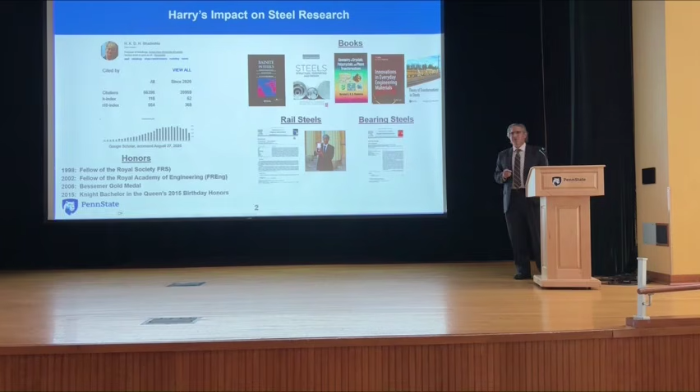So just to give you a little concept of what Harry has done in the steel business, if you are really interested, I would say go onto YouTube. I wanted to play a little bit of this in his own words, but this is just a really great description of a lot of the things Harry has done. And I know people like to listen to podcasts, and if you get a chance, BBC Radio 4's The Life Scientific was a terrific description, and really gives you an idea of how you can take and study and really become an expert in something.

You know, we might consider steels to be mundane, but you really look at what steels have done, where they are, how complex they are, how much of our basic foundational knowledge within material science and metallurgy goes back to steels. It's really fascinating, and I highly recommend every student should really listen to this. It is definitely inspiring and maybe give you a little bit of motivation to continue doing what you're doing. So if I'm embarrassing you, Harry, too bad.

But the other thing is, he's the Tadej Pogacar, and if you are not a cycling fan, shame on you. He's the Tadej Pogacar of metallurgists when it comes down to it. You'd rather have some of the other British riders, but Pogacar has won 4 Tour de France's since 2020. Harry is an avid cyclist. If you look here, that's a 63-kilometer ride he just did. He's an avid cyclist, and one I'm always fascinated by. Not something I like to do around here, because drivers in Britain actually respect cyclists, unlike here in the US.

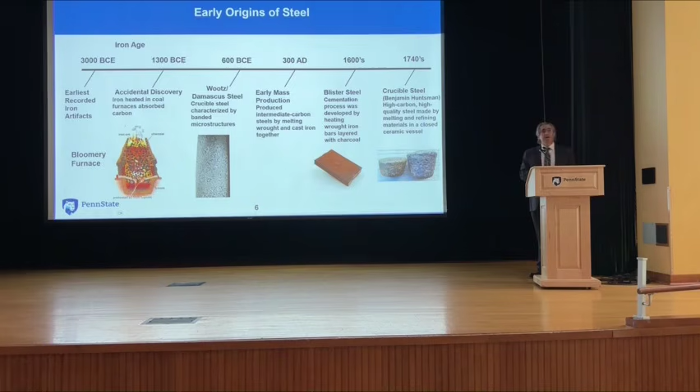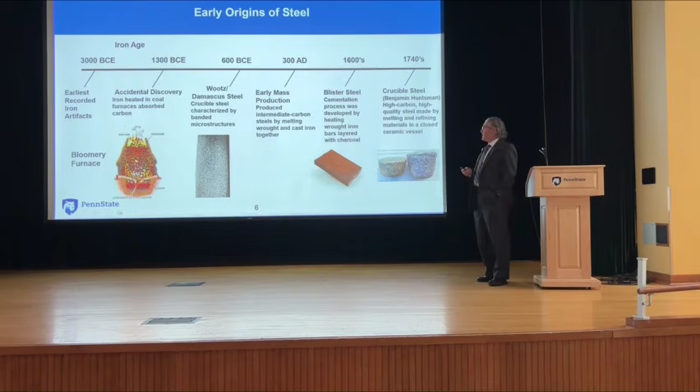Early mass production, and then into what we can look at like blister steel, where basically we were taking wrought iron and layering it with charcoal. Now, if you've been paying attention in the news a little bit, back in August there was an explosion at a coke facility in Clairton, and a couple of the workers were killed in that explosion. Coke is what came after charcoal. They started with trees, figured out the energy density and carbon content was high enough, so they went to metallurgical coal. I saw an article yesterday bringing up the idea of metallurgical coal as well. So back in the 1600s, 1700s, we start seeing these different things. Now these are not really steels, what they are is really high carbon iron alloys. So they're far beyond what we typically look at as steels.

And even in Pennsylvania, I'm sure there's going to be a whole lot of people in town for some reason tomorrow, and a lot of them are going to drive past this. Anybody know where that is? Yeah, it's right at Porter Road. You've probably driven past it, never given it a second thought. It's the Centre Furnace, there's a mansion there. But this is basically why Penn State is here.

As you can imagine, it's Pennsylvania politics. So there was a little bit of something given under the table to get Penn State here. He's the one behind it, whatever it is.

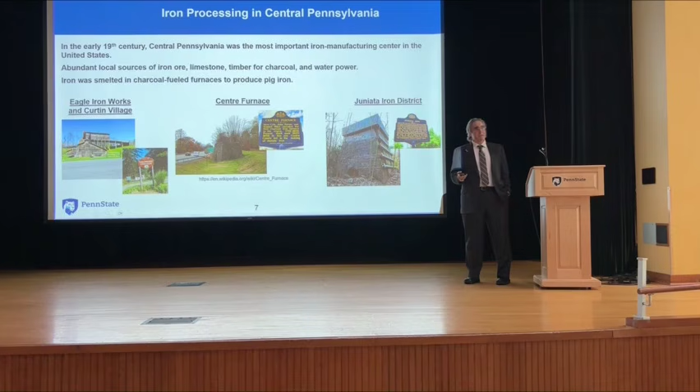So you start looking around at a lot of this old iron, and really what they made was a form of pig iron, which they then converted. Now, there wasn't too much you could do with pig iron, it had all that carbon in it. What did that do? Made it brittle, not really easy to work with. Very simple shapes, very ugly kinds of things.

Now it comes down to the modern origin, and we can look at Henry Bessemer. Found a nice picture of him — I mean, how can you not have a picture with sideburns like that? He figured out that if he blows enough air through, he basically figured out how to make carbon dioxide. So he took oxygen or air, blew it through, and was able to peel off all that carbon.

Some of the early Bessemer processes, we know how it got to the US. Andrew Carnegie, for lack of a better word, went and took it. Some people would say he stole it, which is probably a little closer to accurate. If you haven't read the Andrew Carnegie biographies, I highly recommend them — they'll give you a little different perspective on him.

That brought us into open hearth processes. This is actually fairly modern pictures of it — there are still open hearth process mills in the former Soviet Union, in Russia and in Ukraine. But basic oxygen steelmaking by the 1950s really turned things around, bringing us into what we see as the modern steel industry today.

We can talk about some of the environmental issues of that, but that's not really what we're here for. Being able to mass produce steel really brought us into this modern era, where we go past construction into a lot of the other items we have and really take for granted. Electric arc furnace.

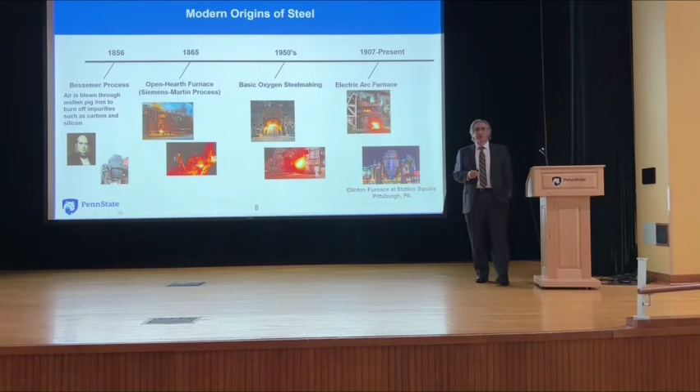But this is actually in Station Square — this was one of the first electric arc furnaces. We have an alumnus here who was a CEO of Crucible Steel, he lives in town and comes around every once in a while, Jim Beckman. He would know that, because that was one of Crucible's original arc furnaces in Syracuse. So this stuff goes around, and a lot of it has been there.

To understand the steel industry, and understand a lot of when people are talking about green steels and what some of the issues are, there's a couple of things you need to understand. There are basically two routes the modern steel industry looks at. One is what they call an integrated route, and that involves a blast furnace — you start from ore, work your way through, make pig iron, convert it into steel. Or electric arc furnace steelmaking, where your input can be what they consider direct reduced iron, or scrap.

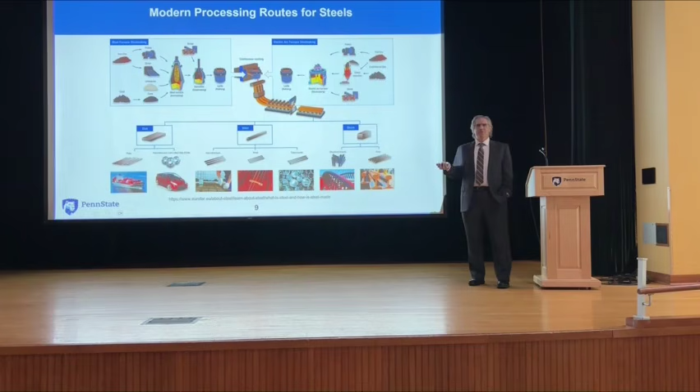Where does scrap come from? Scrap basically comes from automobiles. So when you see car shredders, when you see people bringing things in — your old washer, your old dryer — that's the scrap, and that's the feedstock used in that process.

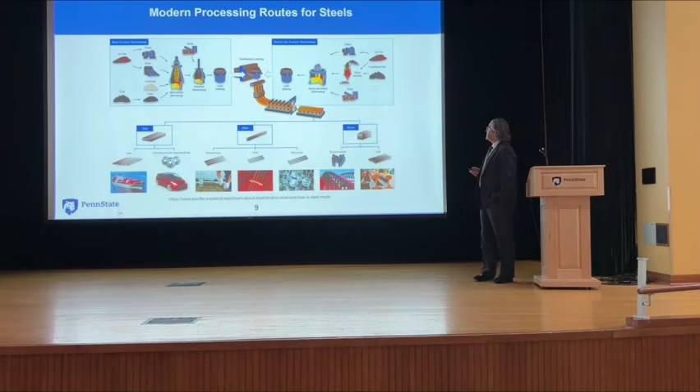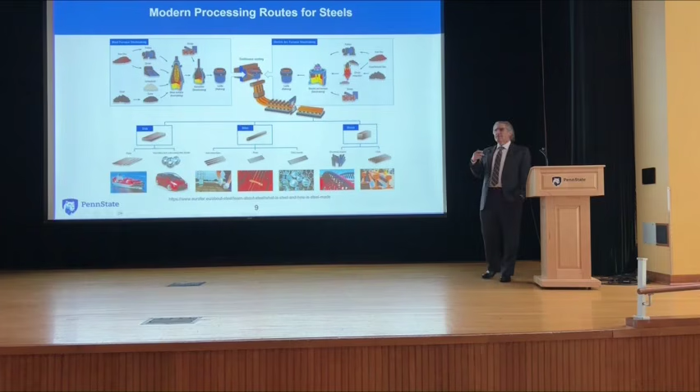A lot of people will tell you that electric arc furnace steelmaking can easily get you there, taking away a lot of this energy. To a point. One thing I'll discuss, and let Professor DebRoy talk about more, is what goes into scrap—what's actually in the scrap material. You don't know, so you start getting contaminants and other things in it. These lead to issues in the steel that I'll talk about later, and how complex they are.

Now there are some emerging green technologies. The electric arc furnace keeps coming back in this talk, but I don't hear a lot of people really talking about what other problems arise from this—what other things process engineers and you as students are going to be expected to deal with, and what skill sets you're going to need to do that.

Green hydrogen-based direct reduction—once again I'll slip into my curmudgeon mode. If you read Turkdogan's old papers from the early 70s, you'll see they were talking about this in steelmaking literature at old Bethlehem, at the Steel Research Center, years and years ago.

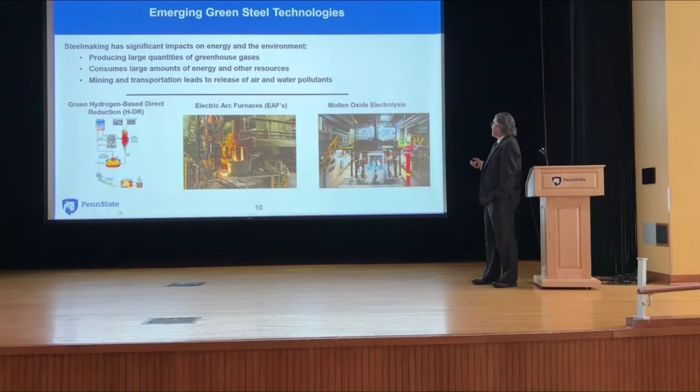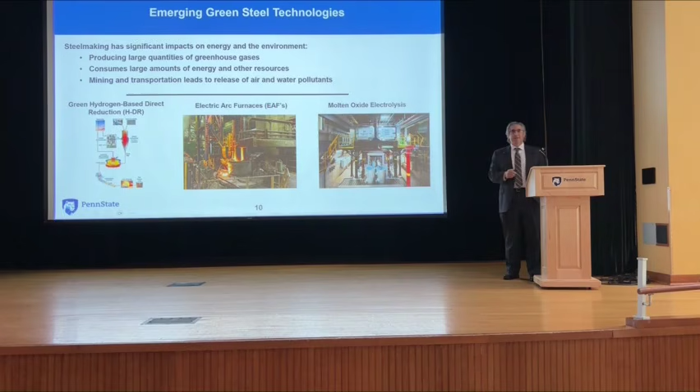Same with molten oxide electrolysis. Professor DebRoy's first graduate student, Uday Pal, was at MIT and Boston University. He's been talking about the use of molten oxide electrolysis for, what, Professor DebRoy, probably 35 to 40 years now.

So that's a little bit on that, but let's think about what makes stainless steels unique. Hopefully these look familiar—if not, I'll have to have a little discussion with some of your other professors here. So there are some common tools here.

Now, these tools look simple. Why do they look simple? Because a lot of people put a lot of work into developing the experiments to come up with really elegant engineering tools. If you go back, the namesake of Bainite, Edgar Bain, at the U.S. Steel Research Center, did groundbreaking work coming up with time-temperature-transformation and continuous-cooling-transformation diagrams. It's amazing the amount of data they were able to extract from a series of S-curves and a number of experiments done on Jominy end-quench tests.

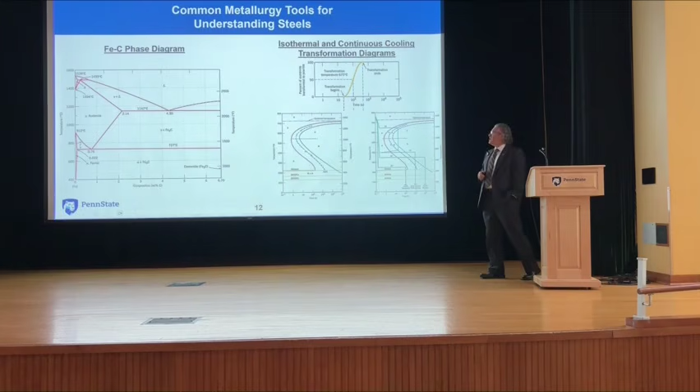So if I'm using words you don't understand, you'll have to look them up, but I'd be happy to talk to you about them. These were just common tools—the iron-carbon phase diagram, these types of tools. They led us into really the fascination there is with steel. And if I sound a little excited about this, it's because it's really exciting from an intellectual standpoint. You think of something as simple as an iron-carbon system.

I can change a small amount of carbon between 0 and 1 weight percent and absolutely change every property of that steel. I can take a 1045 steel, which is this one—the dark areas are pearlite, that's pro-eutectoid ferrite that forms on prior austenite grain boundaries. Just think of all that jargon I threw out there, describing something so simple. It's an iron-carbon system with a little bit of manganese in it.

It's not considered new, not considered anything else. It gets its own classifications as we go from a 1005 to a 1045 to a 1080 steel, working our way up. If I heat treat these differently, I can get all kinds of different properties just out of this one steel alone. I can tailor that microstructure. So when people talk about process-structure-property relationships, it really starts here with steels, and this is where a lot of our understanding came from.

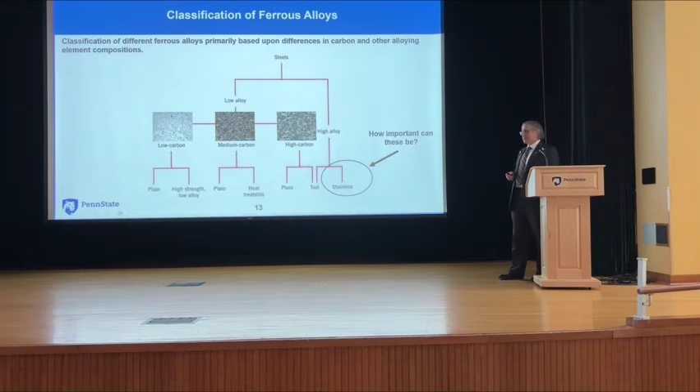Now, moving on here—I'm not going to talk about tool steels or some of the other high-alloy steels, but stainless steels, how important can they be? A little bit stuck off to the side. Well, if they make a DeLorean out of it, how much more important can it be than that? I'm not going to show the other stainless steel vehicle, because this one is a much more attractive looking vehicle than that is.

It's amazing, I watched one of those. Anybody ever watch one of those motorcycle building shows? I watched one where Jesse James was on there. He's going to make a bike out of stainless steel.

This guy builds bikes, but apparently doesn't know anything about stainless steel because he kept trying to quench an austenitic stainless steel, thinking he was going to make it stronger. Couldn't understand why it never got stronger. I was like, idiot.

You've been to the Gateway Arch, a welded stainless steel structure. Chrysler Building, same thing. And in Europe, in Sweden, there's actually a duplex stainless steel bridge.

It sort of starts out with what makes a stainless steel. Usually we take iron and chromium, between about 11 and 30% chromium.

So what's the first thing we do as metallurgists? Let's get an iron-chromium phase diagram and say that's going to describe stainless steels. Looks a lot different than an iron-carbon phase diagram, doesn't it? Not even really close in how they go about it.

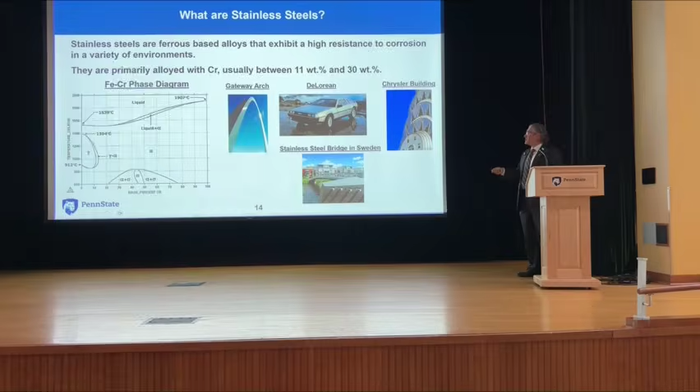Now you start getting some interesting features here. This was one I grabbed off the internet, off the Google machine. And if we look at stainless steels, there's actually different classifications we can look at.

As I usually tell people, I teach the introductory materials class to the mechanical and industrial engineers. I've taught that for years, not teaching it this semester, obviously.

But when you look at materials people, especially metallurgists, they're just Captain Obvious from that corny commercial that was out there. If it's in the title, it's there for a reason.

Like ferritic stainless steels, what phase do you think they are? They're ferrite. You go to austenitic stainless steels, they're austenite. So it's BCC, FCC. Everything's right in the titles. Duplex is a combination of the two.

Martensitic, where did these come from? From just the iron-chromium phase diagram. The iron-chromium phase diagram is pretty simple, not really a whole lot to it, but it's got a couple interesting little features.

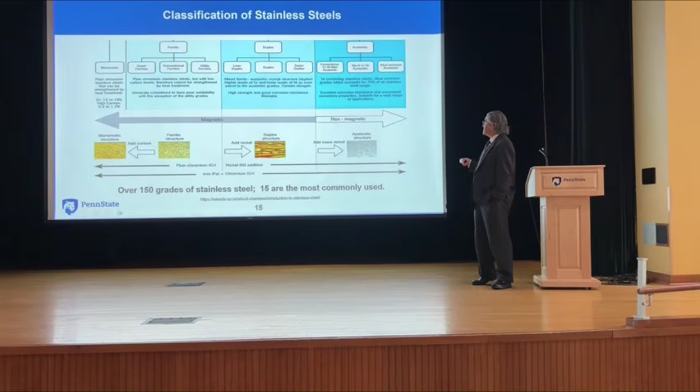But you can see as I'm changing that, I can make magnetic steels, I can make non-magnetic steels, I can start getting into all kinds of things.

Now, my wife likes stainless steel appliances, and that was a requirement when we got married. There was none of these others, everything had to be stainless steel. I was like, fine, until I looked at the price tag, and I said, well, I better get to work.

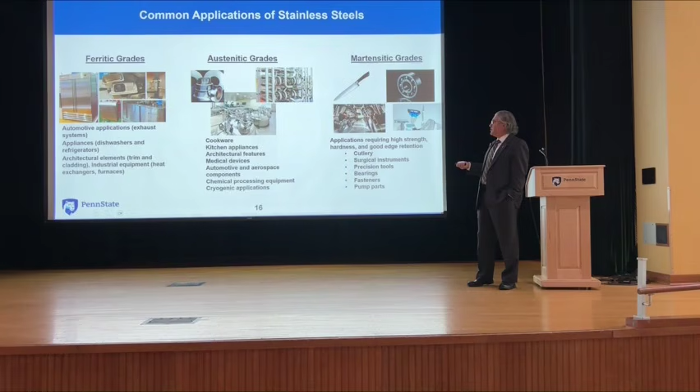So we tend to see ferritic stainless steels in all kinds of things: appliances, architectural elements, exhaust systems, and automotives. The number of vehicles we build in the US, you start thinking of ferritic stainless steel and it goes into the exhaust system. Pretty fascinating.

Austenitic grades - that school in Columbus has made a career out of looking at weldability of austenitic stainless steels. How many careers do you think, Suresh? I think probably like 10. Probably at least. They've spent their whole careers talking about weldability and cracking susceptibility of austenitic stainless steels.

Now, martensitic grades are what I'm going to talk a little more about. These are really fascinating ones that just get largely ignored. Every razor blade you have, every scalpel, you go into surgery, there are martensitic grade stainless steels there.

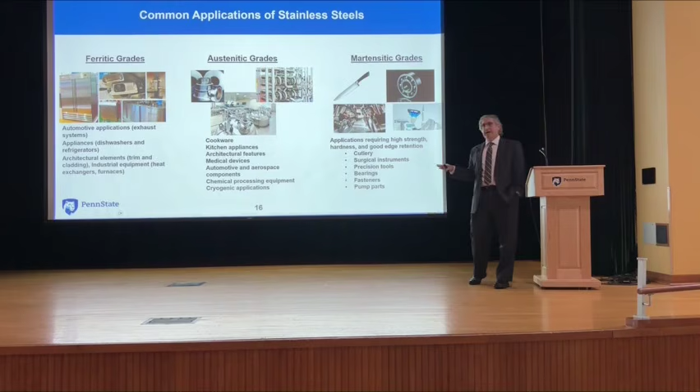Cutlery, surgical instruments, bearings. You fly on a rotorcraft, you fly on anything that Pratt & Whitney or GE makes, there's a martensitic stainless steel stuck somewhere in there.

So these are all important, but when we're looking at these, they're made from more traditional routes. Basically what made the materials industry and the steel industry so good is they got very good at making very common shapes that could be widely used.

A lot of my background is in welding and joining, and if you want to build something, you need to weld it. So most materials companies started out basically with wrought processing.

This is where you start getting into basically continuous casting, annealing it, heating it up, rolling it into shapes - I can make wire, I can make plate, all kinds of different extrusions, coils which are just basically thin sheet, bar product or long product. All across the state of Pennsylvania, whether you're going to Carpenter, ATI, or whatever US Steel is now, these different companies make all of these.

And stainless was always a route for them to go to what they called a higher end market. They're more complex, and we're going to see the complexity of stainless steels here soon.

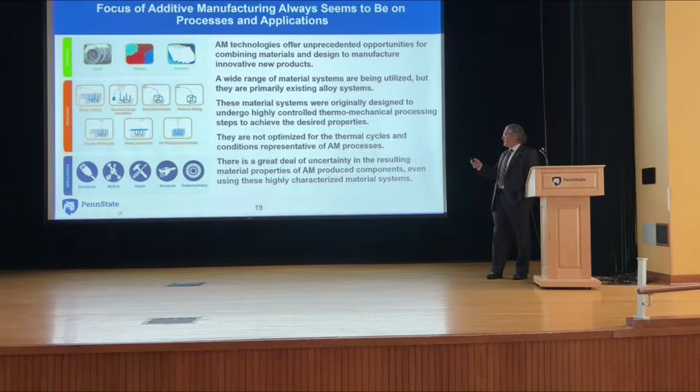Now, part of this is as we start getting into some of these advanced manufacturing areas, what we're going to start doing is working with different product forms. We're going to get away from some of these different shapes, and we're going to get into powders. You want to talk about making something complex even more complex? Take a powder and weld it with a laser and really look at the physics involved in what you're doing.

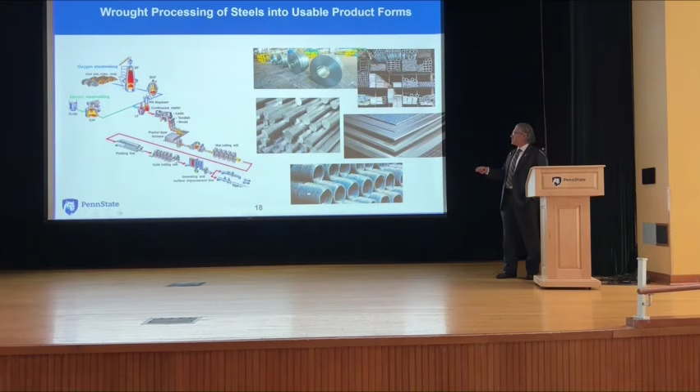Most sane people would have told you that is crazy to go do that. You have taken everything bad about what we've done and everything beautiful about the microstructures and the process structure property relationships that we've designed all these alloys for, and you're going to make it into a powder and melt it with a laser.

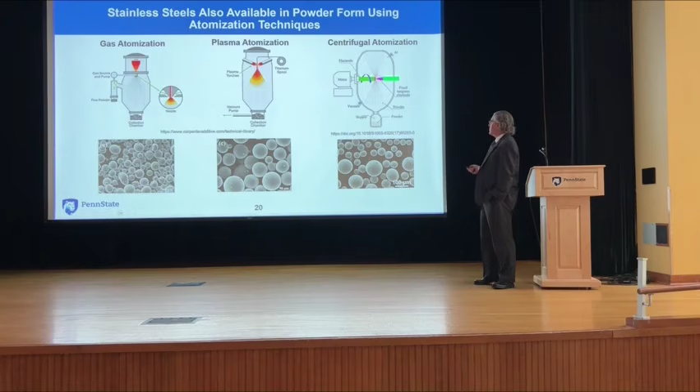Now, even in the additive space, this is my little it's not new either. Don't let anybody tell you that this is new. Actually, a Pennsylvania company came up with it in 1925. Looks like a WAM-based process to me, but Westinghouse, the old Westinghouse labs. You drive down the parkway in Pittsburgh, you will see these. You will see what's left of the old Westinghouse Tech Center. It's pretty sad when you go past it. It looks like apocalypse there, but they came up with the idea of making decorative things. Looks like a WAM-based process.

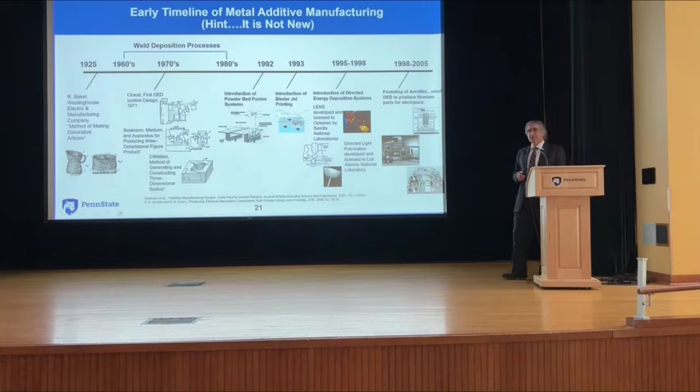Now, what really drove a lot of this, it's a little bit of a misdirection from steel, but just for a lot of the students to understand, why do technologies get displaced? You have to do something better than what's already being done. Why haven't we displaced blast furnaces? Because they're too good at what they do.

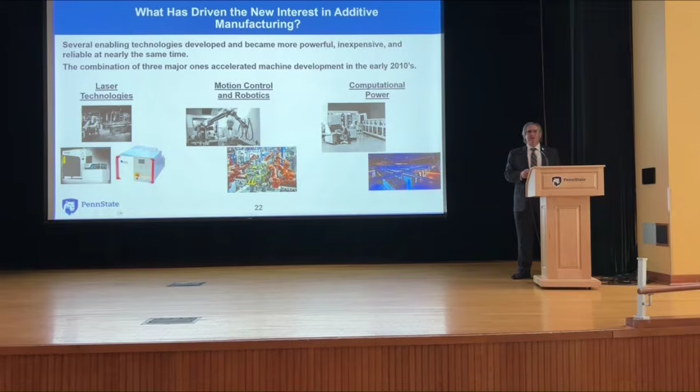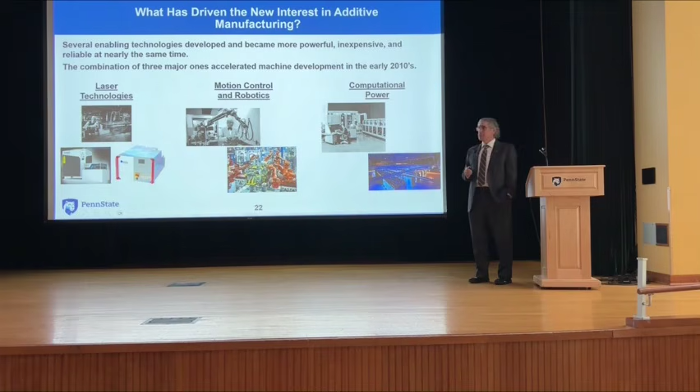Now, in the additive space, there took some enabling technologies to get it to where it is today. Basically, the introduction of fiber lasers was the big one. A reliable laser that didn't use helium as a lasing gas. Motion control and robotics, and then computational power. We hear about that constantly today. What we're going to really realize here, I think soon, with computational power is all those other things that we need—like power generation, water, copper lines, transmission lines—all of that are going to be a big part of it because you need to power the brains behind it.

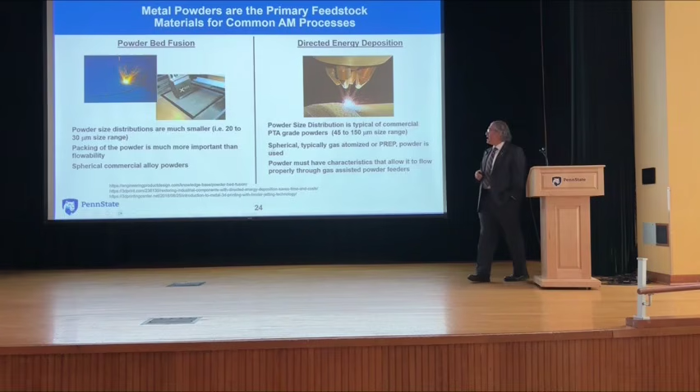Now, the AM processes—we're not going to go too much into this—but powder bed fusion, directed energy, everybody hears about this. I always like to concentrate on the powder side of it and the materials side of it, and more so on how complex it is.

You start looking at what we're doing. We talk all the time as material scientists and as metallurgists of process, structure, property, performance relationships. We have a tetragon. It used to just be, when I was a student, process, structure, properties. But we had to get the third dimension in there and make a tetragon. So we came up with some idea of performance to add to it.

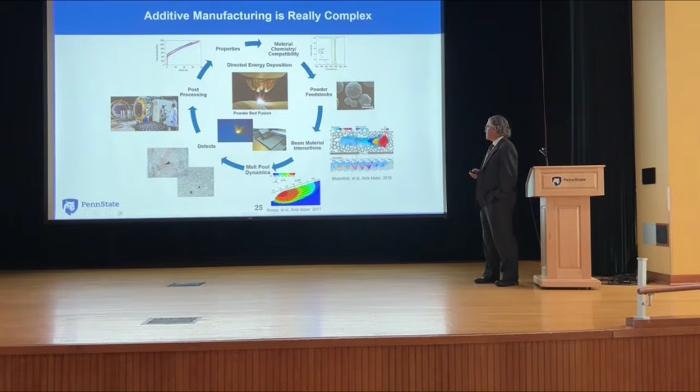But you start with what is in the powder. How the powder feedstocks behave is one, because this is a simulation from Livermore. It's a little dated at this point, but completely unrealistic in how powders actually pack. Completely—it's just like a fantasy of how powders pack. Melt pool dynamics with what Professor DebRoy has done over the years, the defects we have. But post-processing is always there for us.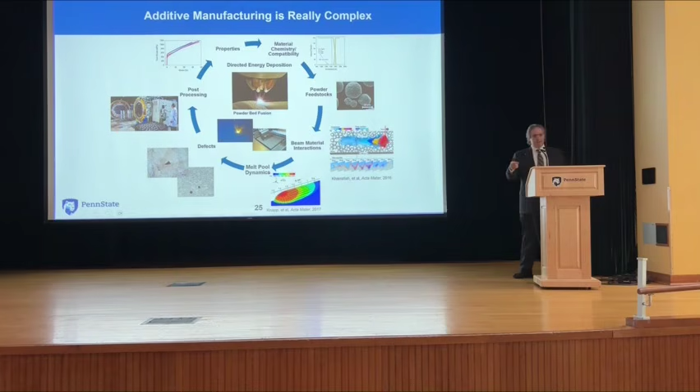And you start thinking about the complexity of these alloy systems and what we're going to run into. You've got ones, and one that I'm big on is variations in alloy compositions. We're going to see how much they actually vary, especially in stainless steels. And an ode to Sir Harry here is the role of interstitial alloying elements in powders.

So in AM, as we start talking about additive manufacturing, we start talking about advanced manufacturing, we start going to powders, they start picking up oxygen. What is oxygen going to do? What is the extra nitrogen that's picked up in the powders going to do? For that matter, what is boron going to do? I'll tell you, I've looked at it in stainless steels, and as we start looking at the scrap stream getting contaminated, it's going to have boron.

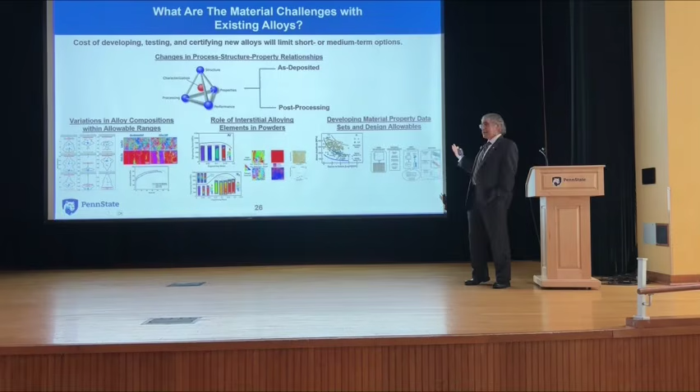It's going to have a lot of these other things, copper into it. And the other one is sort of like developing material property data sets. This is the one that really comes down to it.

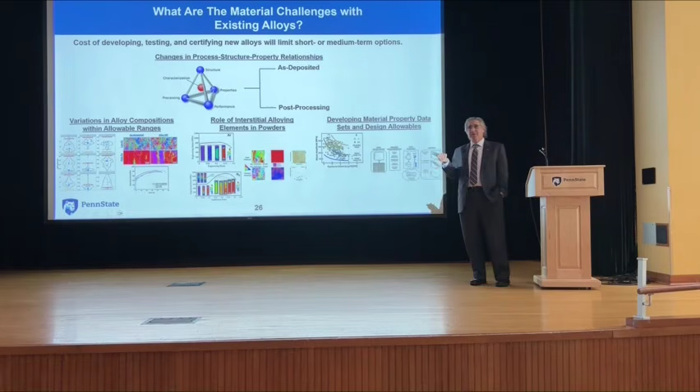Now, we spend a lot of time in the AI and ML field talking about really trying to understand processing. What do people actually use? What do our designers, our manufacturing engineers, our mechanical engineers need? They need material property data sets that are accurate and reliable and have small levels of scatter. That's what MMPDS is, the Metallic Materials Properties Development and Standardization. I'm probably speaking Greek to most of you, but MMPDS will be a critical part of your life, right up there with ASTM.

So these are a couple things to really focus on. Now, how complex are they? I don't know if anybody's working in high entropy alloys, but if you're working in steels, don't let them pick on you. High entropy alloys are simple, there's 5 components to them. They don't do too much.

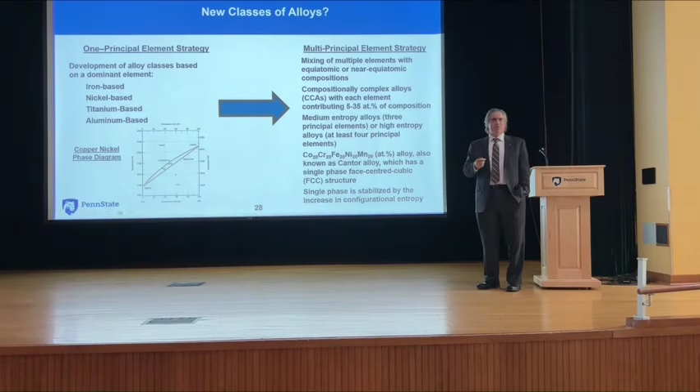Now let's think about what goes on in a stainless steel. An austenitic grade alone, I've got 1, 2, 3, 4, 5, 6, 7, 8, 9 components. They don't measure nitrogen, oxygen, or boron, but they're important, so I've got like 13 components. So 5 versus 13, where's the complexity? Complexity is here in a simple 316L stainless steel.

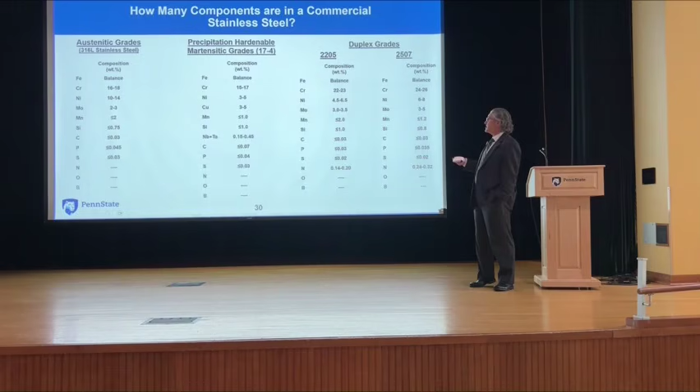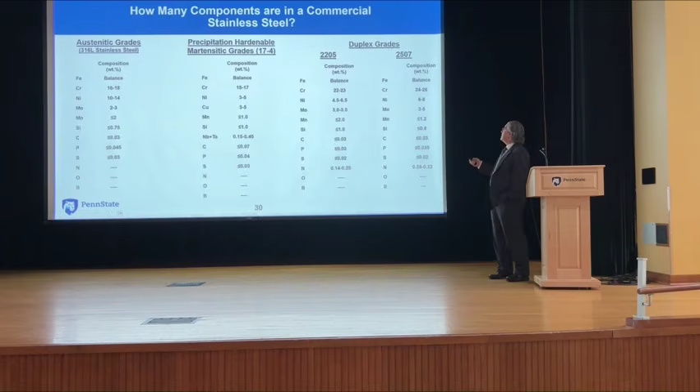Because a lot of things can go wrong, especially when you start processing it with additive processes. Take 17-4 — I've got 8 heats of this material sitting in my lab, and it heat treats 8 different ways. We can't figure it out. Duplex grades — I see one of my former students, Andy, here. He spent a lot of time talking about these. Duplex steels are fascinating, the ones that we don't use here.

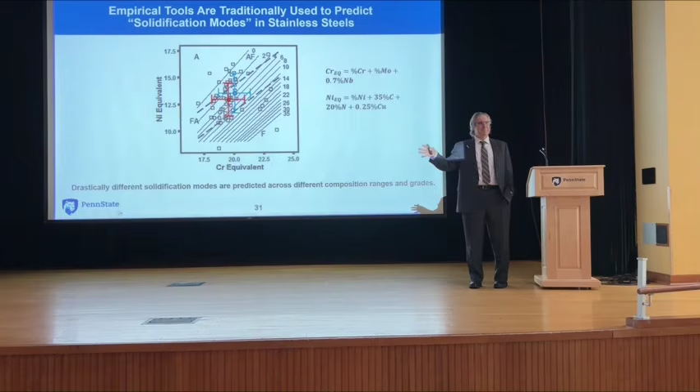So when you really come down to it, what we're trying to do is make everything look like a binary phase diagram. We're trying to put everything in 2 dimensions, because we all think in 2 dimensions — we've been taught forever that we take a sample, prep it, look at one slice of it in 2D, and that describes everything about it. Is that true? No, not at all.

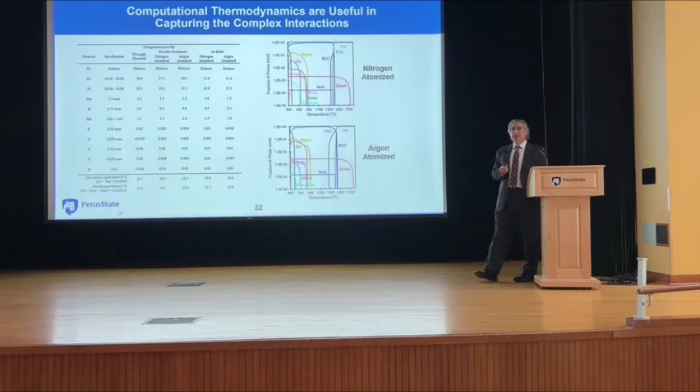And then there's computational thermodynamics. That iron-carbon phase diagram looks so simple, but these are for 316L stainless steel, and the difference here is a slight difference in the amount of nitrogen. What we start seeing is sigma phase, which is not something you want. If you're going to have corrosion problems in an austenitic or duplex stainless steel, sigma phase is going to be somewhere in it. It shows you how, even at small amounts, these different secondary phases can play a role in leading to defects and failures — and it's always the failures you don't expect.

It's always those catastrophic failures that occur, especially in things like fatigue. That's why, as most academics, we test everything in static tensile loading, because it's something we can sort of predict.

These give you variations in composition. If you vary between 0.5 and 1.5 manganese in an austenitic stainless steel, you get two completely different alloys. They won't even behave similarly. We've had issues with a nickel-based alloy 625, where we saw a 25% difference in yield strength because of a slight change in the iron content.

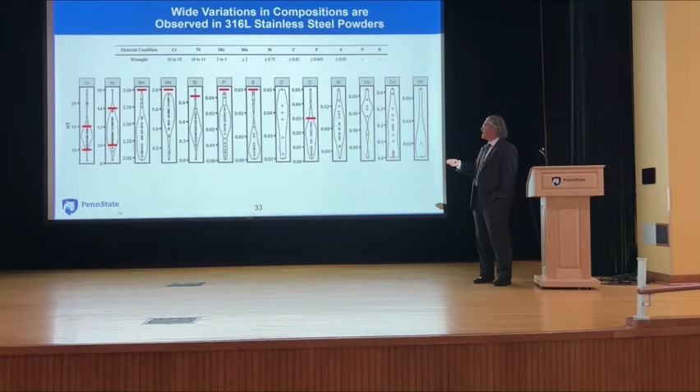So even within these allowable ranges, there are issues. The other issue is apparently a good number of people in the literature don't understand what a 316L standard is, because they've reported 316Ls with chromium levels outside of the allowable ranges. So is it really that or not?

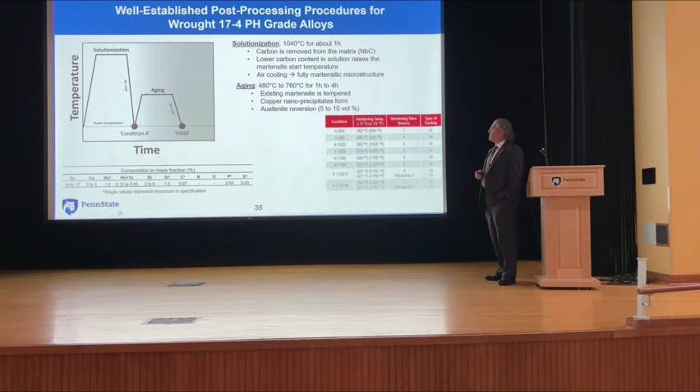Now, what's the role of minor alloying elements, how do they impact it? So I'm going to jump to 17-4, a precipitation hardened stainless steel. You'd say, what's that? This is used constantly—about every turbo machinery component you can think of has 17-4 somewhere in it. Precipitation hardening means it needs to be heat treated, and we do a couple different heat treats to it, but once again, this was the same idea: how much do things vary?

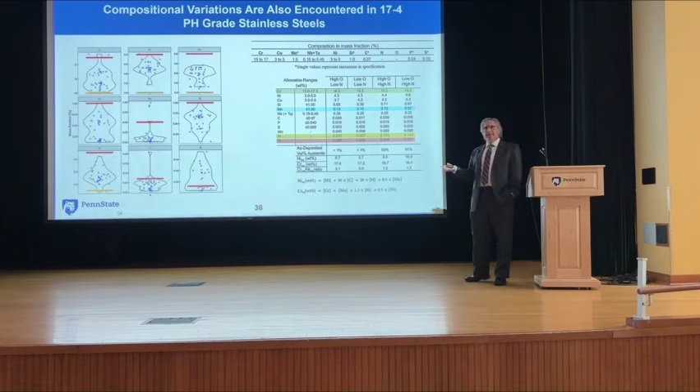We started looking at this, and what we saw were huge variations in different heats of material. I've had reviewers come to me asking what heat-to-heat variability is, and I'd say shame on the journal editors for having these people review articles, because heat-to-heat variability is something you're going to have to worry about even outside the metallurgy field. It's the scatter in the data and how different materials can vary.

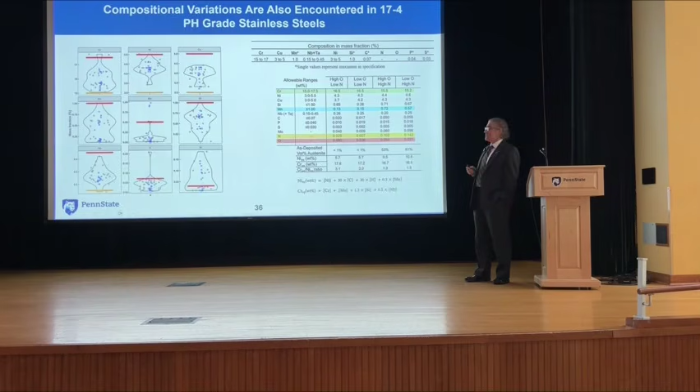You start looking at the heat-to-heat variability even in these, and this is just in powders—a small subset. They can vary significantly. What I want to show you is the differences in the mechanical properties out of them, and that's just ones we grabbed out of the literature. These are additively manufactured, powder bed fusion, pretty standard alloy. I don't know, as a designer, how you're supposed to be able to deal with that.

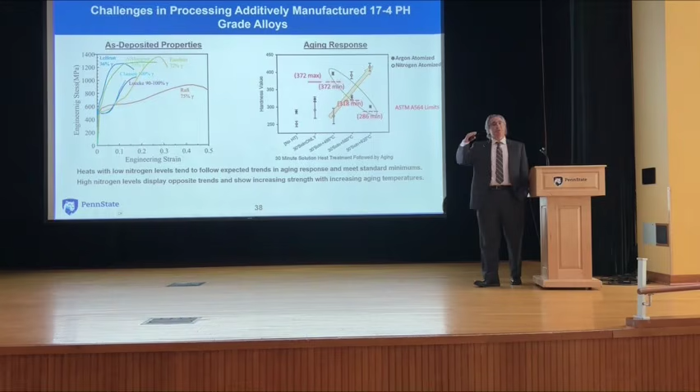Now what we did find was that when you heat treat these, it's supposed to be peak aging at a low temperature and overaging after that. We actually found that a whole portion of these actually got harder as we aged them at higher temperatures. Some differences there, but I do want to talk about something else—we have this issue with heat treating, and I want to talk about oxide inclusions a little bit.

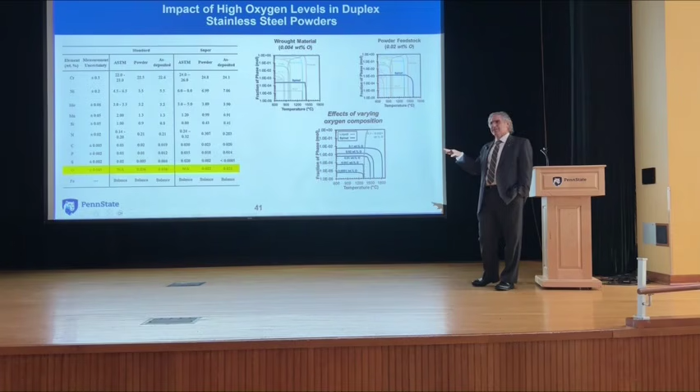I know Andy's happy about this because there's a lot of his work from his PhD work with me. When you have a wrought material, they're easily able to control the oxygen contents in them. So if I take something and roll it, and I put all that care into the steel to get it into this type of microstructure, I'm going to have a low amount of oxygen. I'm going to make it fairly difficult to form oxide, so I'm not going to have a whole lot of oxides—I'll see some here or there, but not a whole lot.

Now, when I take it into powder and increase the oxygen content just a little bit, from 0.004 to 0.02—I mean, really, what's one hundredth of a weight percent among friends? It's not very much, right? Unless it's a gas. What I start seeing is this spinel phase, which is a chromium manganese oxide, that actually starts to form in the liquid, which means—can I heat treat my way out of this? No, it's there forever, until you do something else.

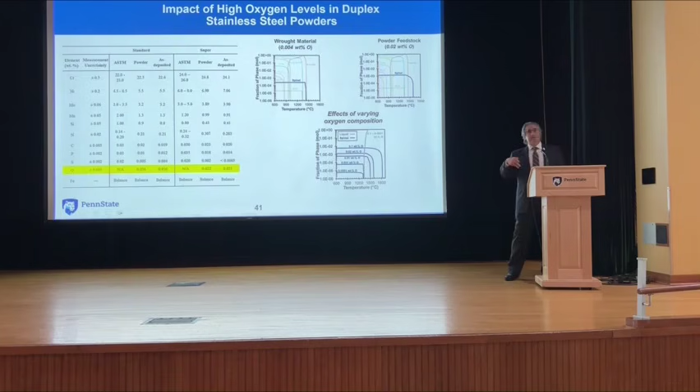Chemical engineers have a little statement they make: dilution is the solution. So what that means is, how do I get rid of it? I add more iron to it, to dilute it and make that amount smaller. We do that with copper all the time in steels—to get copper levels down in the scrap stream, you just add more iron, you add direct reduced iron. But what you start to see here is you can start forming a lot of oxides, and they appear in the powders, and even so people say, oh, it's just on the outside of the powder. Nope.

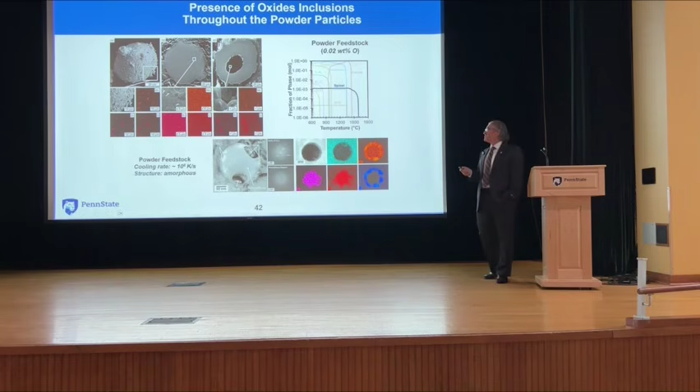This is a cross-section of a single powder particle. It shows up in there too. And when we started really looking at it, it actually shows up as amorphous because of the rapid cooling rates of the powders as we produce them.

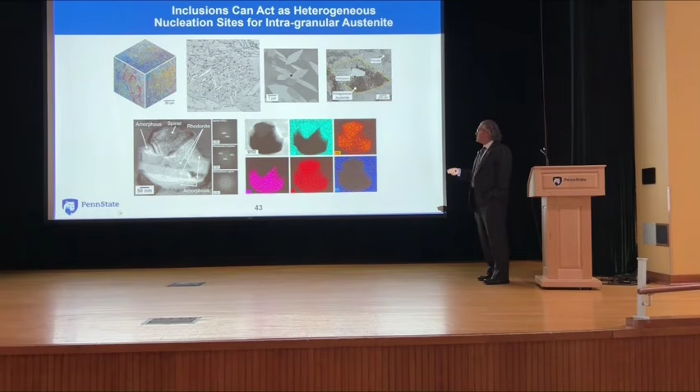And they will develop as you start increasing the heat treatment of it. So if you start hot isostatically pressing it, you start doing all these things, you start running into an evolution of this inclusion, and sooner or later it will show up all over the place as you start looking at your additively manufactured component.

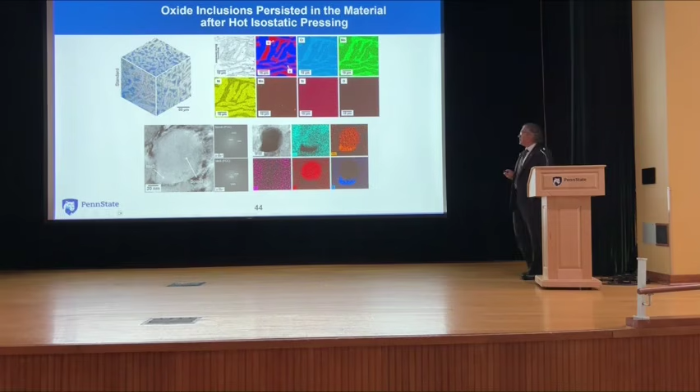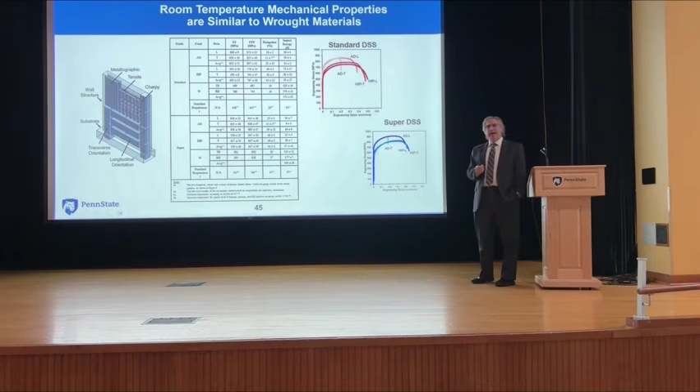The issue becomes, and there's some thought there, is, hey, there are oxide inclusions, there's oxide dispersion strengthening, right? When we start looking at really static mechanical properties, that's fine until we do things at low temperatures.

Red is bad. So a wrought material is usually about 100 joules at negative 46 degrees C impact energy, Charpy impact test. We were breaking them at like 8, 20. So the oil and gas industry says no way to using these because of that.

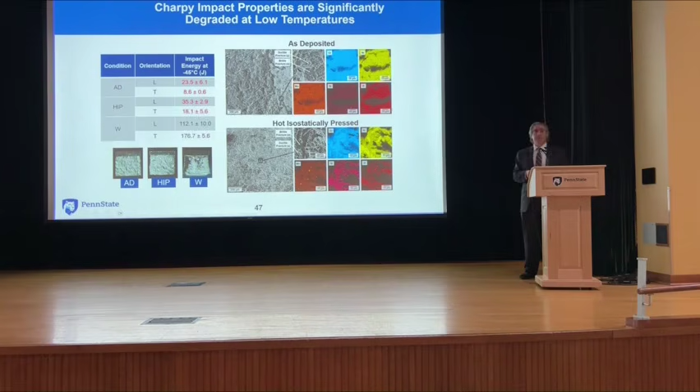Now, why is that? A lot of it has to do with the size and shape of the ferrite and austenite phases, but a lot of it has to do with all of these inclusions sitting all over the place, going back to the role of interstitial gases in there.

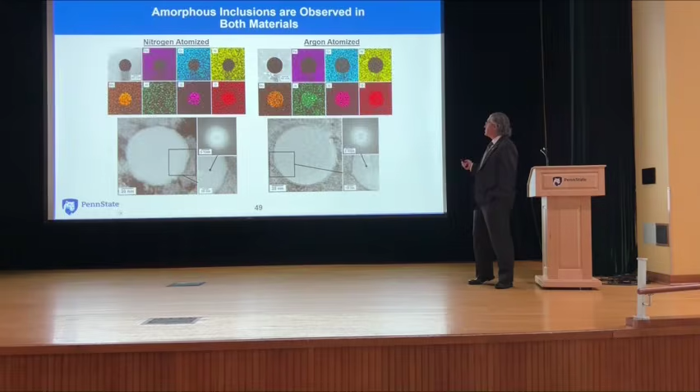And so even in austenitic stainless steels, you say, well, it's a problem in duplex stainless steels. Well, they show up in austenitic stainless steels too, whether I have a certain amount of nitrogen, low level or high level of nitrogen or not. They show up basically in 17-4s. They're there as well.

And what you notice here is sort of different names here. All the oxides are different. And so the complexity of these starts to grow.

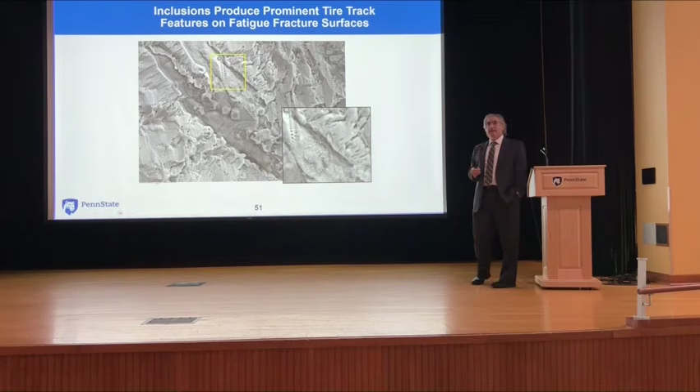Now, if you're a fatigue person, that's never something you want to see. That's what we'll call a tire track. So that is an oxide inclusion that actually on a fatigue surface left little indents as it worked its way up. So we've got a lot of complexity in these alloys.

And that's mostly what I wanted to get across to you today, was that stainless steels are complex, and Harry's going to talk a lot more about the basic science behind nitrogen and oxygen in these. And as we start seeing the differences in the compositions that are there, they're going to have impacts on what happens.

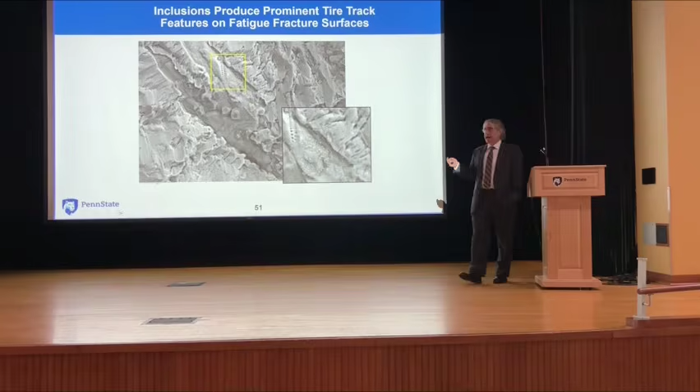Now, I wanted to hit on this a little bit. I had one other student. He's also at NIST and probably sitting pretty close to where Andy sits, down in a materials measurement laboratory at NIST in Gaithersburg. He has a National Research Council postdoc fellowship. So if you haven't looked into those as a postdoctoral opportunity, I highly recommend them as well. Those are very good opportunities and very prestigious.

So it sort of comes down to, as material scientists and as metallurgists, our goal is really to take what we do in processing and develop properties that designers can actually use. So we're critical in any of the design aspects that come along. Now, when we start thinking about how do we ensure safe structures, material properties are a pretty important part of that. They're critical to it.

And most designers are only going to take data that they want or that they can use, that they have confidence in. Now, how do you develop confidence? You basically show that there's a limited amount of scatter. So there's a requirement of statistics.

So I've been recommending to most of my students that, especially as a metallurgist, because we're metallurgists mostly because we don't like math that much, what you should do is start befriending a statistician, because that's really where the big data and the data analysis is really what's coming out. Because up till now, really, as metallurgists, a lot of what we've done has been a data sparse environment. We get 1 or 2 experiments, they're expensive to run, we take that data, we run with it.

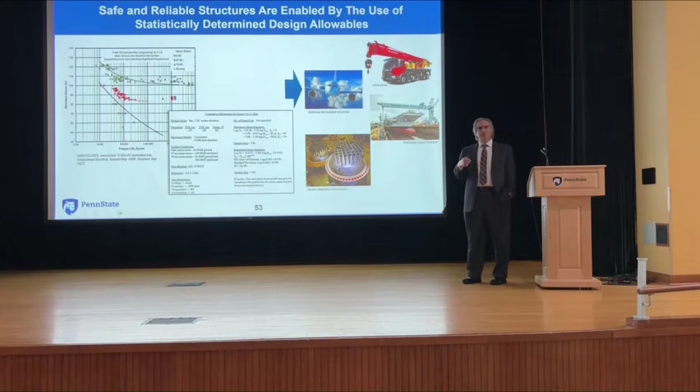Now there's more need to start looking, especially as we look at some of these data sciences, AI, ML, whatever we want to call it. They're requiring these large data sets. And so we don't have the money to produce the testing of that. So one of the things would be to really think about how do we produce the data to support this. Because the models are only as good as the data that goes into them.

I'm apparently a little bit of a Luddite when it comes to this, but garbage in, garbage out still matters. And so you can fool LLM models. You can corrupt the data sets. You can get them to tell you just about anything if they don't have good data going into it.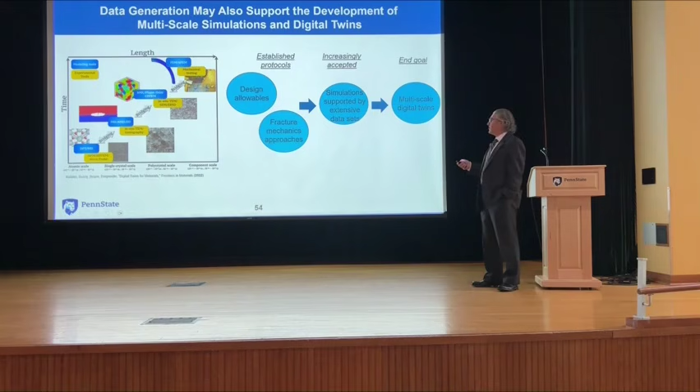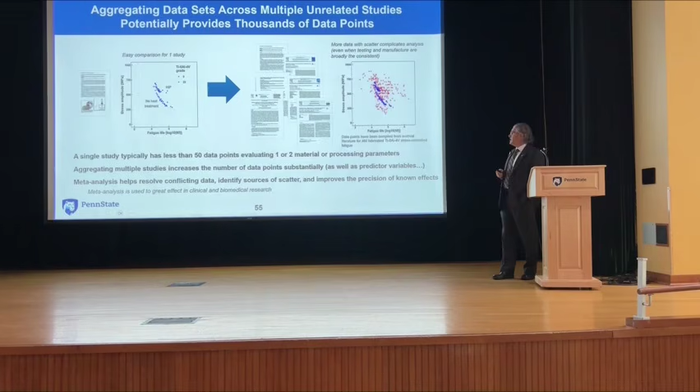So where can we get some of that data? The literature is rife with data, if you really look at it and go back and really start searching for it. I had a student, down at NIST, who did this just looking at 316L stainless steels.

So Wrought conditions. Usually in the AM field, people will tell you we're lacking data, we're lacking well-pedigreed data. What we're going to see is most scientists and academics have done a really poor job of reporting the data they've produced. There hasn't been a data dictionary, there hasn't been a common methodology to report the metadata that goes along with just a fatigue test.

There are cases in the literature where people haven't reported an R value for their fatigue testing. If you do fatigue testing and somebody doesn't report an R value, it is completely worthless. And I know you're laughing, but we've seen this. It's amazing that this stuff got published, and sometimes even in reputable journals.

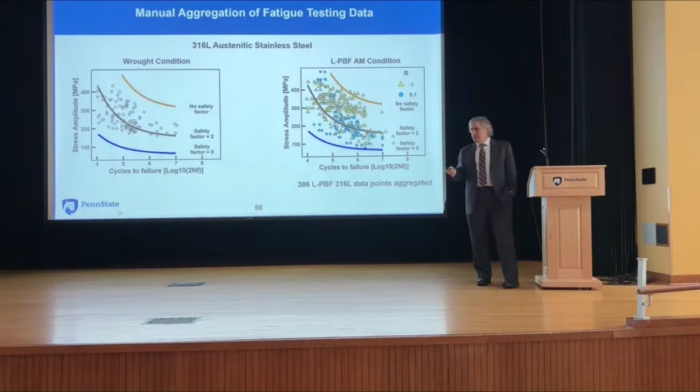But we look at the amount of data here versus what the Wrought conditions are. It's not so much that we don't have a lot of data points, it's that they're scattered all over the place. There's no trend line to them. So what we can do is start thinking about taking that data and being able to operate with it a little bit.

So there's a lot of data out there on the AM side. A lot of it is difficult to use because it doesn't have a lot of the metadata that you need, but a lot of the metadata, sort of things like material properties, testing conditions, processing, things you've done to the material in order to get those parts, those data or those properties.

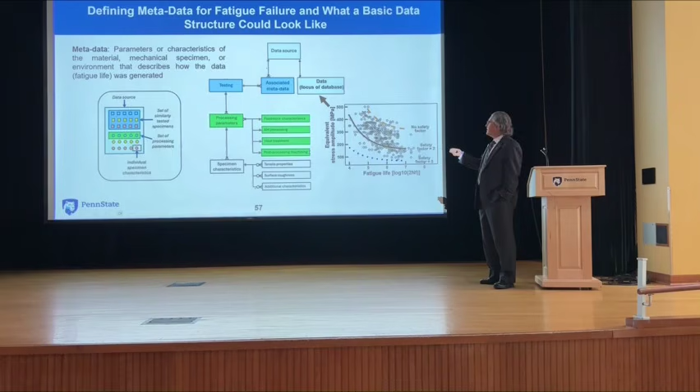One of the issues is there's no data dictionary. There's no set definition that we have for everything that comes out and about. And without those set definitions, people can call it anything. This is where a lot of the models tend to fall apart, is when they start looking in the papers that are out there trying to extract the metadata, there's not a common data dictionary for them to go to. So one author may say one thing, another may say another, but it's actually the same thing.

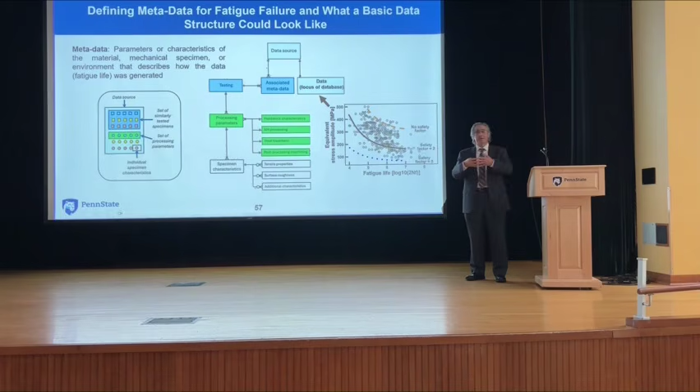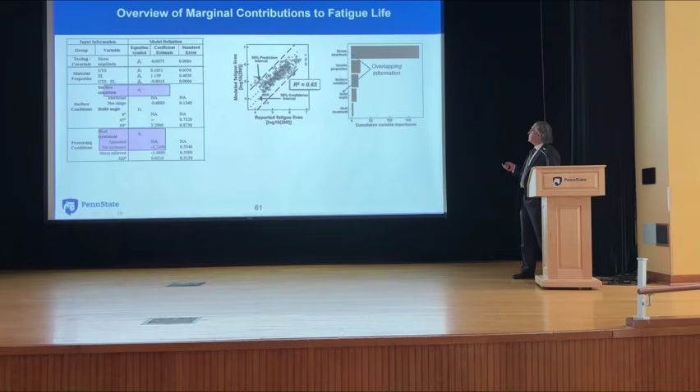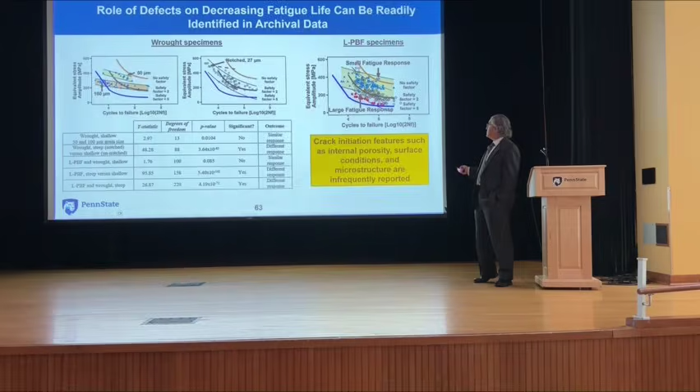And so when we start talking about the expertise that goes into it, that's sort of where it goes. Now, what I just wanted to jump to here was some of the work he did. You see a lot of data, but really this idea of contributing and going into the data and being able to identify the role of defects versus microstructure, even in fatigue for 316L, bringing us to where I want to end up today, and hopefully teeing it up for Harry to give you a good lecture on oxygen and nitrogen effects, and hopefully for Professor DebRoy to tell you about critical materials and scarcity.

But AM materials, these are multi-component systems, and we can say that about AM material systems in general, but stainless steels are compositionally complex alloys at the end of the day. As we start looking at advanced manufacturing techniques, we're really subjecting them to conditions we've never really expected. I used to joke with people as far as Ti-6-4, especially when additive started to come out, the designers of Ti-6-4 are rolling in their graves at what we're doing to the alloy and expecting it to perform in certain ways, because we've completely forgotten about process structure property relationships with that.

The other thing is these interstitial alloying elements are going to be critical. Our understanding of the role of oxygen and nitrogen in stainless steels is really going to be the game changer that comes around, especially as we start talking about the scarcity of common elements like nickel, chromium, manganese. Anybody know what the critical materials list that the US government, USGS, produces every year? Take a look at that. About a third of it are critical elements to steels, stainless steels, nickel-based alloys, titanium alloys. It's not just about batteries and magnets. It's about every component of what we look at as our modern lifestyle.